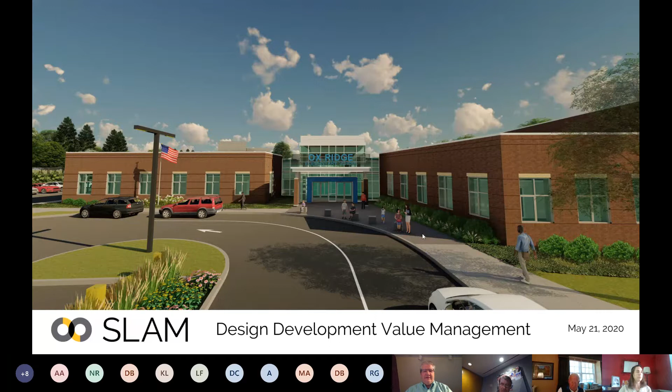I wanted to thank the committee for their patience in this process. It's never easy creating a one-off building from scratch, as more information comes in during design development and costs are ascertained, especially on a site like this where it's an occupied construction site. But I'm confident, and I think you'll see today, that we'll be able to get this project into our budget range. With that, if you could advance a slide, Amy.

Our basic agenda today is to go over our cost reduction goals. We've got site strategies to talk about, small reductions in building area which are more nip and tuck type adjustments—no program is being cut, it's just rearranging a few things to reduce building area. We have some reduction of extent of exterior walls to discuss, and some major component systems that are still very energy efficient, primarily the HVAC system, which we'll go through in more detail, plus a few other large item savings, as Kip mentioned.

So the way it's structured, I'm going to go through some sub-lists of the value management list the team has been maintaining. We've developed a list over 100 items long, some small, some large, and these sub-lists represent what Kip first mentioned: estimate adjustments. This tends to happen as we go through the process—when we reconcile numbers between two estimators, there invariably are things we dive deeper on, and the team vets the numbers and makes sure the scope is correct. That's what these savings numbers represent.

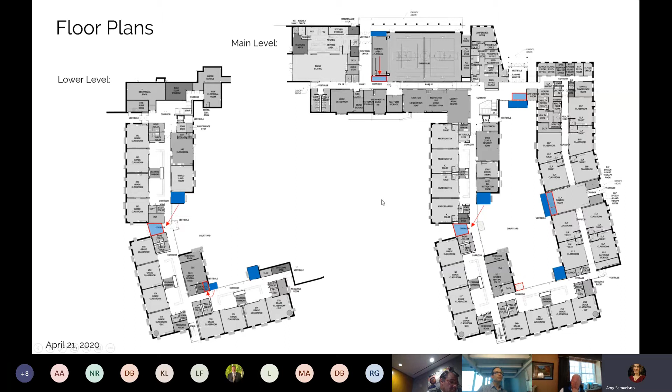Okay. So if everyone feels comfortable with understanding these plan changes, I'm going to move on.

Okay, moving on. This is a similar visual where the bump of the vestibule to the lobby is reduced, so that tall wall pushes back and addresses only the lobby entrance, and the facade is cleaned up and reduced. It gives more space at the patio area, and square footage savings calculated at $45,000, right, Dave?

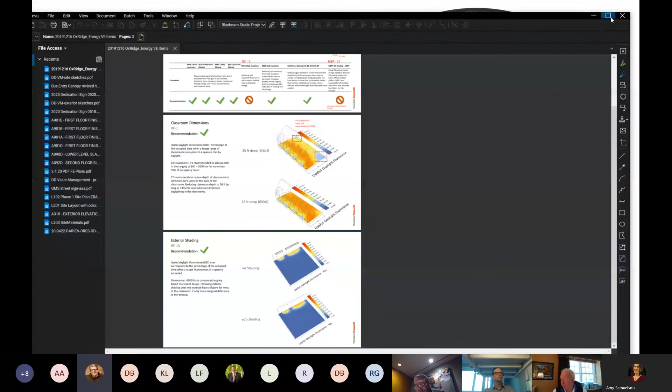And half of the classrooms are on the lower level. I think you'll recall, Rusty, that we shared a study we had done regarding the amount of fenestration for each classroom, and that 35% was kind of the magic number. Anything over that created undue glare and drew a higher need to condition the room. If you did a 30-foot wide classroom with 30 feet of glass, that exceeded over 50% of the exterior wall of glazing, and it provided no more benefit than the 35%, which is about where we stand right now.

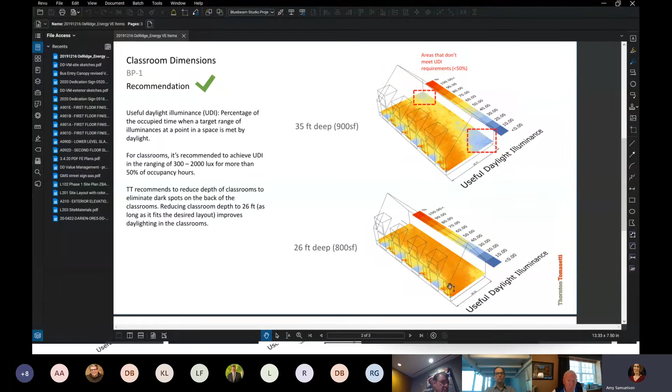Right, so I just switched what's on the screen. I think you can see this. This was at the time of schematic design when we were going from one amount of square footage of light to another, and I can't remember the percentages we had before, but we can have Thornton Tomasetti redo the daylight study you see on the screen, and then take a look with and without the exterior sunshades.

Right, I don't want to belabor the point, we have to move on here. But the newer types of skylights have zero glare, just so you know. Well, depending upon what glazing you select, that's certainly true of everything. So that's a wonderful development, we're lucky to have that.

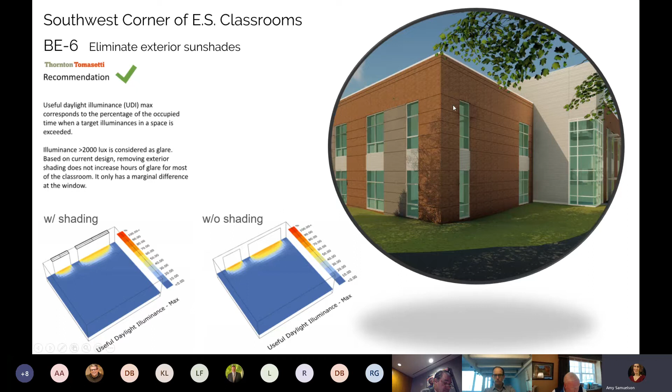Amy, or actually, sorry, Dave, what was the cost savings for BE11? That was a little over, once you put the markups on it, between $90,000 and $95,000. Thank you.

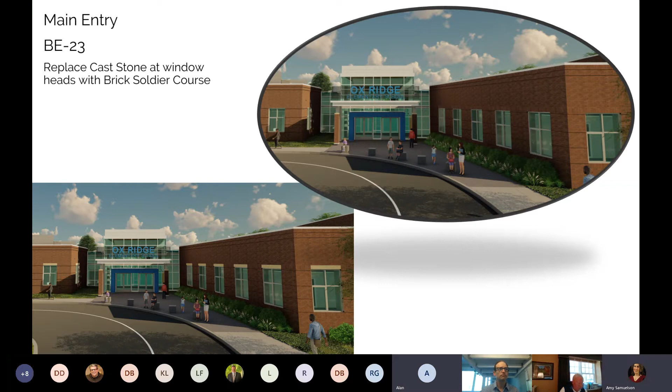Okay, great, that's good news today. More to consider for the committee.

This one, I just wanted to give you a graphic representation of what it means to accept the MEP item number 21, which is to go to DX cooling instead of chillers. One noticeable change would be that on the rooftop you would no longer have the large chillers that sat behind the gym roof or the gym height wall over the library area. Those go away, and the piping back and forth to the chillers goes away, which is why that savings is so significant.

What would happen is each of the air handling units on the classroom areas would be enlarged, not really noticeably from the ground, but each one would have its own cooling capacity within it. As you can see here, there are several air handling units.

Amy, also associated with item 8, that is a reduction in structure and slab depth underneath that chiller to support the dunnage, and ironically even the dunnage itself would be removed, which contributes to the price of that item. Thanks, Dean. Yep, that's true.

Amy, this is Kim, could you just provide the information on the annual cost increase? I think it was around $3,500 a year differential. Did we confirm that was annual? Yes, that was confirmed to be an annual additional cost. So the payback on the value management item of $850,000 or so is a long time, I don't even know the number of years, amortized over 100 years.

Okay, so we've agreed upon that one, everybody. Why don't we take some of the site ones that we feel comfortable with, or if people don't feel comfortable, we should hear about it. I think Amy, go ahead. Amy, can you put the large value management items list up again? Yeah, that would be helpful, thanks.

There we go. There you go. And this includes the site ones, which I think is where Kip wanted to go next. Well, I just wanted to go through some of them quickly.

S2, the milling and overlay of the main entry would be great, provided that Duke's comment about excessive trucks and traffic over the road doesn't end up causing material damage. And you're going to do that by bore samplings to see how strong or deep the road is right now, so that's a good one if we can do it, right? Absolutely. And what's the feasibility, do we have any new utilities or services coming down that main line that are going to get trenched and torn up, or just natural gas? We do have new services for electrical, and the new replaced water line will be in the shoulders of the road, Nick.

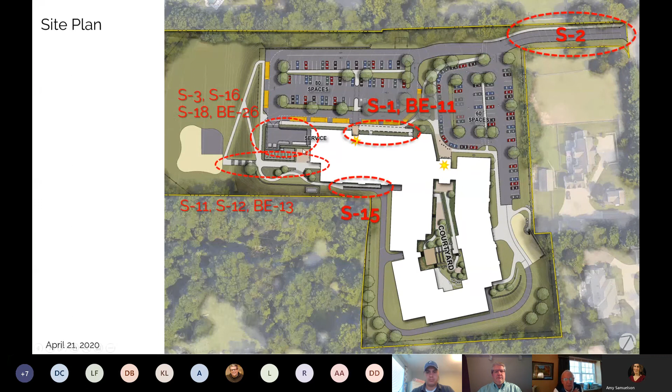The next one: louvered panel fence and gate replaced with chain link fence and plantings. That's going around the service area, correct? When we discussed it on Tuesday, our concern was it was going to be just plantings at first, but the answer was no, we're going to have a chain link fence. It'll be green, vinyl covered, but there'll be plantings in front of the fence, at least on the cafeteria end, so it will be well disguised, but the children cannot go through it, that's the whole point. And you're replacing what's represented by the yellow dashed line here. Does anybody object to that as a savings, against what was a louvered metal fence before? Yes, it was a louvered metal fence that was much more solid looking than a chain link.

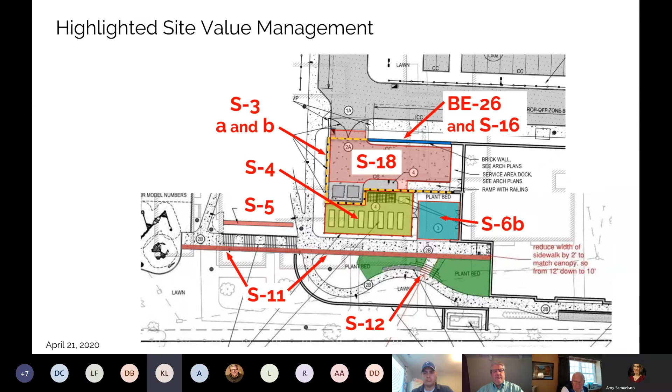Go ahead, Katie. I just want to say that I want to emphasize how important I think the plantings would be in order to prevent a sort of institutional feel that aging chain link fences can have. So as long as the landscaping screening is not going to be cut, I would be okay with making that change. I would agree with you, Katie, I think it's essential, thanks for pointing that out.

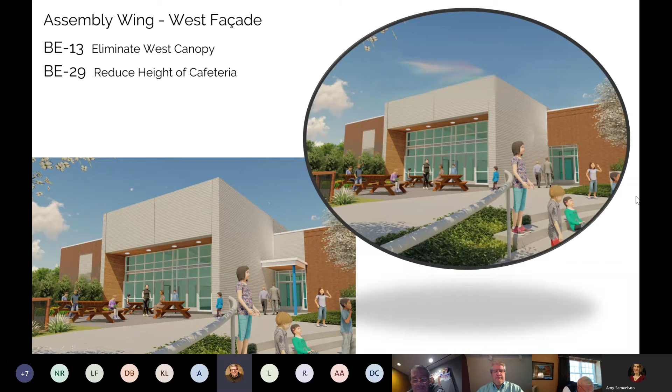And it reminded me to go to this slide. It's distant and in the background here, but you can see that Jessica has selected evergreens for that area. And even though the fence was rendered here as a solid fence, it's obscured, so I think going to the chain link is a good decision insofar as it'll be hidden at this location. The chain link fence disappears with the right plantings, whether it's hemlock or arborvitae, it grows right through it, which is kind of the look you want anyhow. Amy, your panel with the reduction of the slide also shows some plantings when you're looking back up the hill, which is a good look.

You can begin to see the very pale gray behind there, which is the more dense fence. To Katie's point, I think you're looking more at the shrubbery than at the fence itself. So that fence could, to Duke's point, become much more transparent, and it was the plantings that were helping provide the screening, while the fence provides the actual enclosure.

So given all that, are we all in favor of this one? Yes. And in this particular picture, Kip gets to go down the slide first. Thanks very much, Duke. Head first. Now let's go back to our other big ones.

Okay, so providing concrete versus pavers. I'm having a hard time understanding what the difference is, but it sounds to me like if you can do it for less, concrete's pretty good. But does anybody have a point of view on that one?

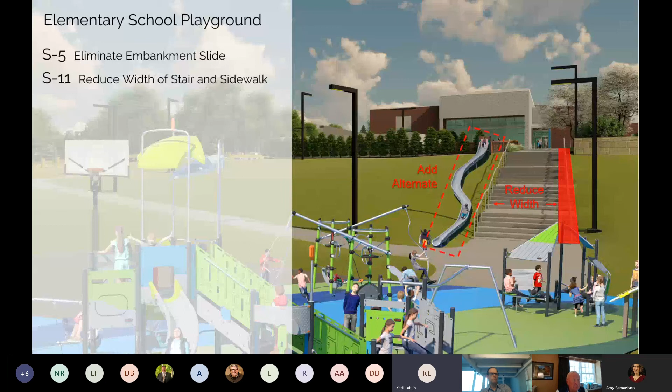This is Katie. I have some concerns about how drastically the exterior portion of the assembly wing will be changed by eliminating both the ombre, but most specifically the canopy. We spent a lot of time working on that, talking about how it would break up the mass of this long, big brick wall. I'm just concerned of what we might wind up with.

Again, to Sean's comment, Katie, we are studying this right now, and we're developing additional images that we will bring to the committee to review that in more detail.

Hey Kemp, one other piece to that - I honestly can't see the images, but there was a discussion earlier in the presentation about the sidewalk elimination coming around from the front to the side. Is that sidewalk the extension of that canopy that goes up from the bus lanes and around to the front that talked about being eliminated? It would not be eliminated, just reduced in width to match the opposite side of the bus entry. Oh yeah, okay, good, all right. That's why I just want to make sure, because if it was being eliminated, I'd like to see that too, but if it's still there, that's great.

Thanks, hey Kemp, it's Duke. To Katie's point, and I know you guys are working on it, but you wind up with this massive wall, and if we go to a single brick color, an option to break it up might be plantings, but then you get into the size of plantings, so you're removing one cost but adding another. I'm sure you guys are thinking about all this, but that's where my head goes in terms of tall, skinny tree plantings we'd have to substitute in to break that up a bit. It's such a big area, we just need to see something sooner than later around your thoughts on that.

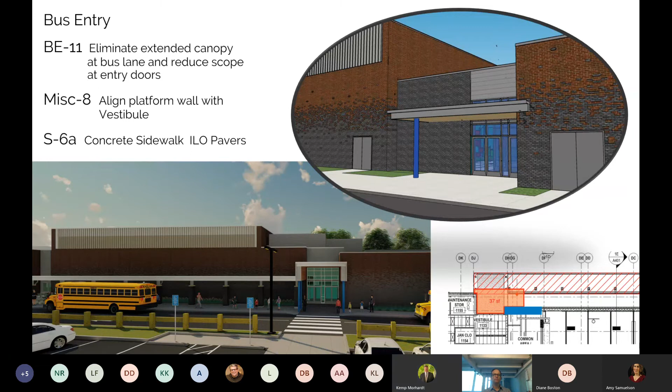Okay, the BE16, eliminate fritted glass at entry and courtyard. I gather the idea was to make that an add alternate. Correct.

Everybody agree? Any disagreements? Sorry, this is Katie. I just have to say that I would be really, really sad to see this go. I loved this idea, and I thought that it would really bring a lot to the school, not just in the courtyard, but also in the hallways, especially during those winter months when kids aren't getting outside as much. I really liked the idea of the light patterns it would play on the floors. I would be very sad to see this go.

It's my understanding that there was an alternate for this as well, in terms of - I think Dean, you had spoken that there might be something less permanent that we could consider. Yeah, that's right, Diane. There's different types of films that can be applied to the glazing interior surface after the fact, but there's a level of permanence there that just doesn't exist with the frit pattern kind of inherent to the glass.

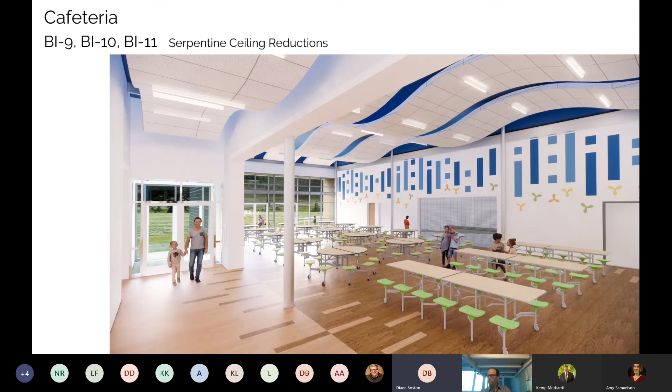This is Diane, I would support that. I think in all the interiors that we've seen, having something kind of special at the very entry, but otherwise having paint—I think we've spoken a lot about, especially in the classroom areas, that there's a lot going on with color and pattern that the students will bring to it, and that may not be necessary throughout the entire building.

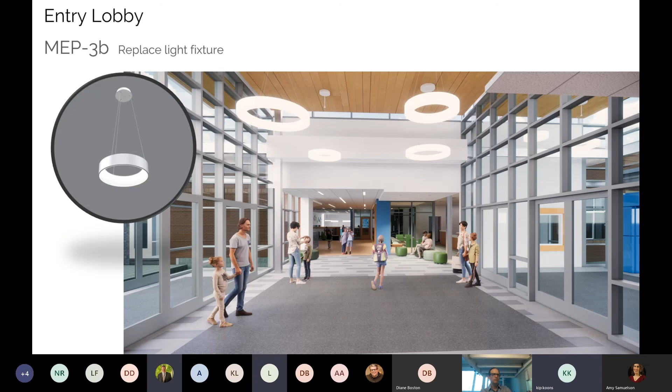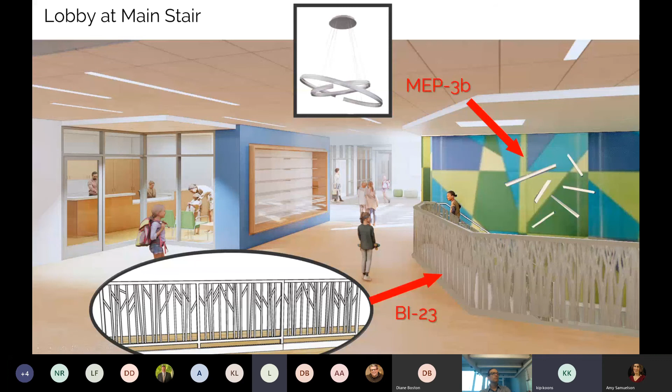There you go, so I just brought it back to the list. I don't know if there was no objection to that one, or if people want to wait on that decision. BI 6.

This is Diane, I'd support accepting it. I don't know how everybody else feels, but I would support it. If you support it, I'll support it. Katie, I'm okay with it. This is Kip, I put a note in the remarks of the value management list that we'll accept it and look for alternative approaches with paint and/or include certain wall coverings as alternates. Is that acceptable? That sounds great.

Okay, sounds good. So we've decided that we're not going to eliminate the serpentine ceiling in the cafeteria. We might consider eliminating it in the corridor. Might.

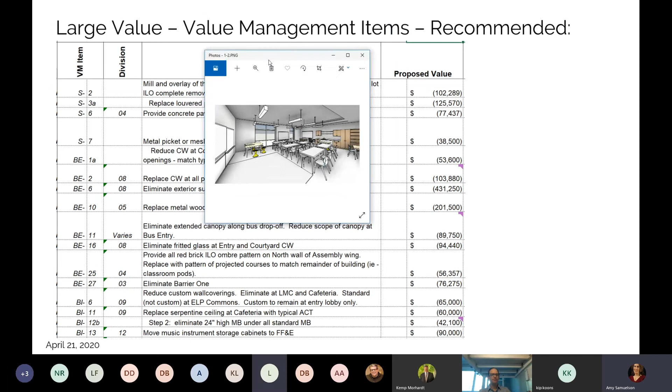Okay, the next one is BI 12B, and I found some old renderings I'm going to put up here for you. This is more of just a view from our Revit model of the classroom, and what we're calling for in that value management item is that these low marker boards that you see where my cursor is, below the standard height marker board, would either be eliminated or become an alternate.

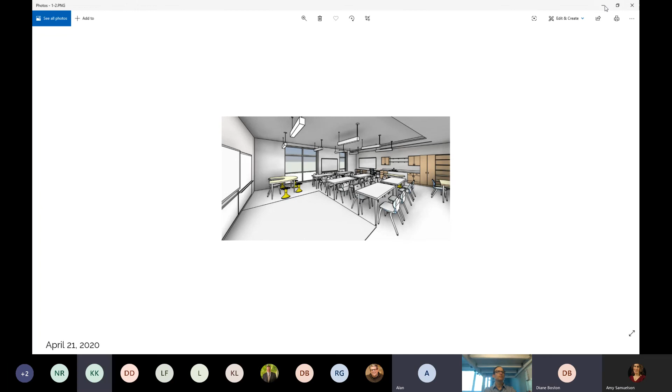Yeah, we did talk about this before. I think this is something that if you want to add to the FFE budget, that was something we could do later, I thought that was the logic here, but to pull it out at this point in time, this is one that's an easy add alternate. Yeah, absolutely, that's fine. I think it's very important to keep it as an add alternate because it is a nice feature. If we can keep it, it would be great. Okay, I agree. Done, next.

BI 13. This one I think is also easy to accept. We will make sure that we maintain the amount of music instrument storage cabinets that you need for the project, but we put it in a different budget, take it out of this one. And I think, Amy, you said that there's room in that budget for this, so it's not like we're just taking dollars one place and putting it someplace else. That's right, we would look to absorb this value into the other soft cost. Okay, thank you. Sure, next.

I'm not sure what BI 20 is, but we've already approved BI 23. To be honest with you, BI 20 really should be on the design team accepted list because this is kind of in between an estimate adjustment and a scope clarification kind of thing, because it was estimated as interior storefront aluminum, but it was designed as hollow metal, and it's just a savings that we can accept. Am I stating that correctly, Amy and Dave? I agree with that, Kemp. I agree. All right, that's done. And we've already, it seemed to me, approved BI 23 when we approved the exterior metal fence, custom, the design by Dean. All right.

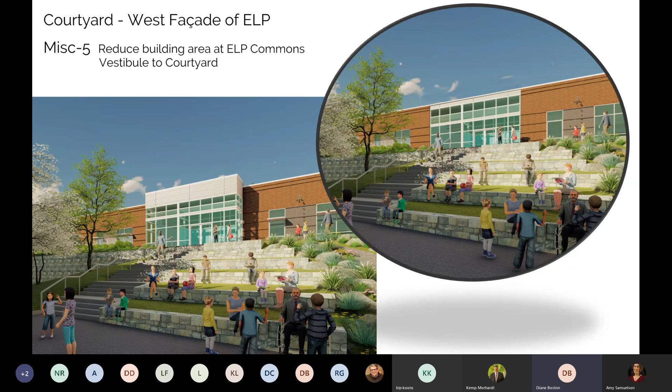I think giving consideration to all these items is really valuable. I think it tightens up the design quite a bit. I have a little bit of concern with the relocation of the room into the hinge. I'd like to see a little more design on that. And perhaps, likewise to Luke's point, a simplification in this location being shown right now, the entryway to the courtyard - I think it benefits the courtyard appearance, but it would be nice to see how the interior lobby might be designed and impacted by less space. So a closer look at those two in particular. The other items I felt very comfortable with - the change to the ELP, vestibule, and the other space changes. But these two in particular, this one as well as the move of the room into that knuckle, I'd like to see a little more design on.

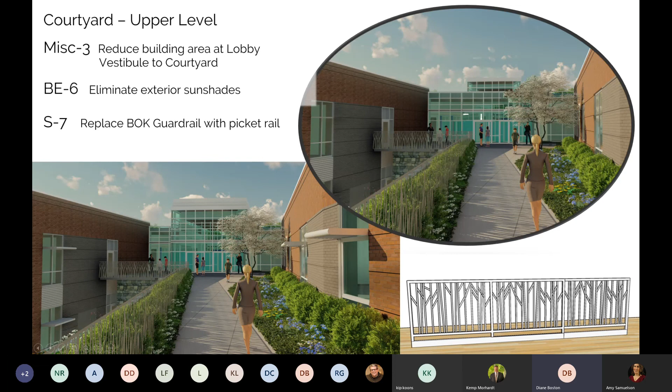Okay, understood. So going back to the list, I can delineate which that is. One second. Right.

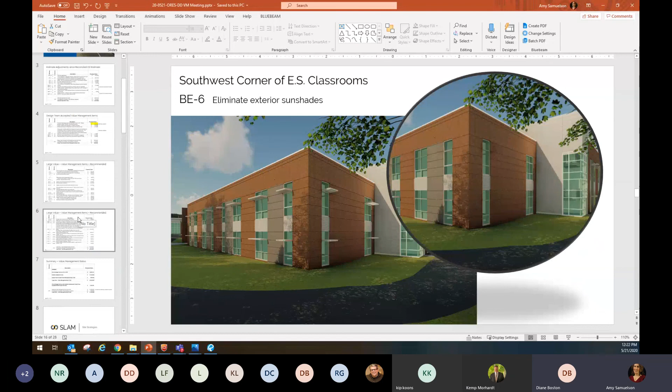Well, so that would be accepting - we didn't talk about 4, but I think 4 is sort of an easy one. The price is unfortunately a little lower than the 39,000. 4, 5, and 8 sound like they're accepted, and 6, which is the redesign at the hinge, and 3, which is the lobby vestibule, we'll provide additional plan and design slides for you. Okay.

That runs through our list today. Obviously there are some things on the list which we've deferred or want to hear some more about. The biggest one is the sunshades in terms of dollar value, but I think we're almost into the 2.5 hour mark today, and that's a lot of work. Are you satisfied, Amy, that we've covered quite a bit of ground here?

Absolutely. I appreciate all of the recommendations and accepted items that you've already decided upon. I think that MEP 1 is a big decision that helps us move forward on redesign of that basement that we talked about in last week's meeting. So that's a great help to us. And we'll move forward with providing you some more design visual aids to help you make your decisions about the bus entry and these other area changes.